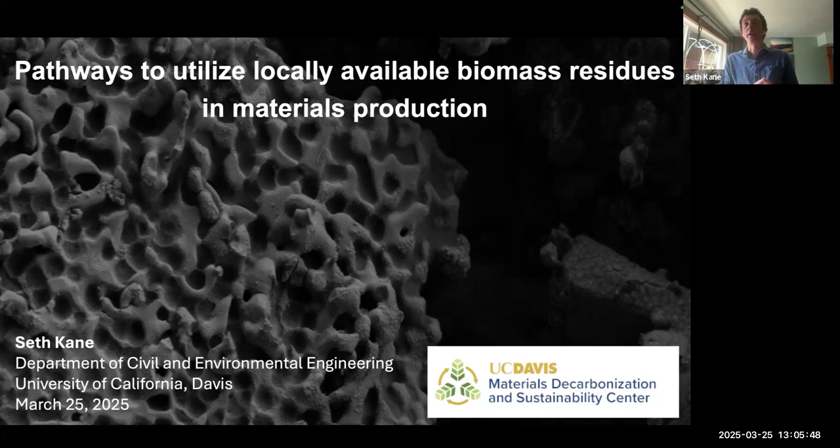Awesome. Thank you, Savvy, for the introduction, and thanks everybody for being here today. So as Savvy mentioned, I'm going to be talking about pathways that we can take to utilize different biomass residues in different materials, how those can contribute to decarbonization of materials production, and how those can contribute to carbon dioxide removal broadly.

Okay, and so we're going to try to go through three goals of how to use these materials. The first is to talk about what pathways have been examined that allow us to utilize these biomass residues in materials production. The second is going to be what trade-offs are there between using those biomass residues for energy producing processes versus using them in materials, and what considerations we might want to make between different pathways to utilize those in the best way possible. And then how we can utilize those residues in which materials. So are there particular residues that work well in one material, but not another?

And so to start with, I want to give some context around what global materials production looks like and what the availability of biomass residues looks like in comparison to that. And so when we look at the materials that we're producing, there's a lot of concrete, a lot of wood, a lot of asphalt, some brick, steel, ceramics, and plastics. Of that concrete, about 4.2 gigatons is cement. And relative to that, we are producing more agricultural residues than any individual chemically processed material. So not including the aggregate in that concrete, there's more total agricultural residues than any individual material.

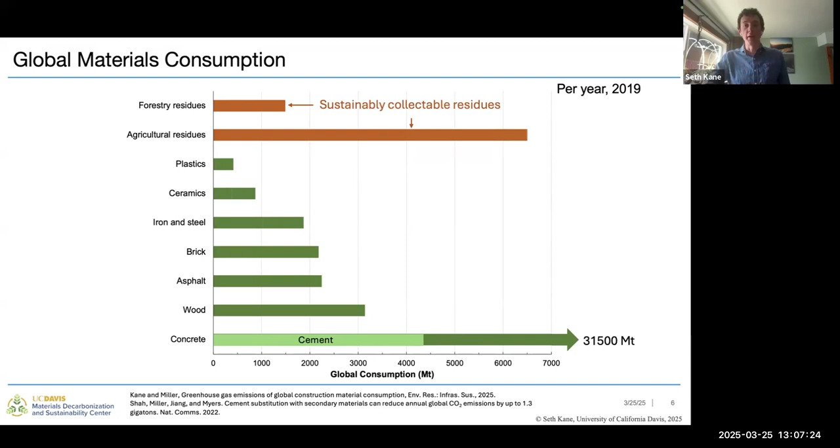In addition, there's some forestry residues. And when we're talking about these masses, and we're going to carry this through, this is the amount of these residues that we can collect under sustainable agricultural practices. So leaving enough in the fields to allow for the soil to regenerate, not just pulling everything out.

When we look at the emissions from this, we can see our iron and steel and plastics move up a bit and become the second and third most emitter, even though they had a little bit less production. And we can compare this against the amount of carbon that is uptaken by photosynthesis and stored in our forestry residues. And between the 7 materials shown here, we emit about the same amount of carbon from production of these materials as are stored in agricultural and forestry residues.

So we can see there's really a lot of potential here, both in terms of the amount of mass produced and the carbon fluxes into these materials to potentially use these to offset some of the emissions from materials production, and enough mass of these to do this at a fairly large scale. And we're going to focus most of our discussion in on these big three of concrete, steel, and plastics, and really mostly on concrete and plastics for some reasons we'll get into in just a little bit.

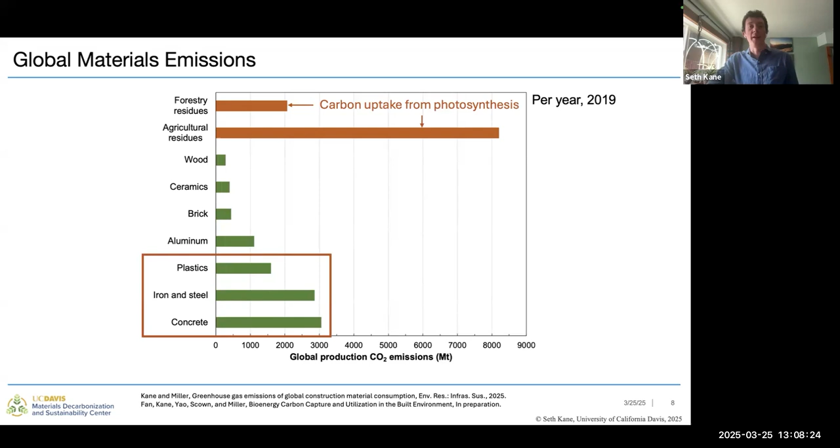It's important to note also that when we're talking about these residues, they're not all the same, and we don't produce the same amount of all of them. So we really produce a lot of corn stover, and then after that, rice straw, forest residues, and wheat straw, with some lower amounts of some other residues.

In addition, focusing in on those 4 highest produced residues, we can see that they have some variations in properties. So here we're showing the 3 key organic components of biomass. That's going to be your cellulose, your hemicellulose, and your lignin. These make up most of our plant-based biomass globally. And then there's also an inorganic component. We can see that these vary a little bit, with our wood-based biomass having more lignin and less hemicellulose, and our straws having more.

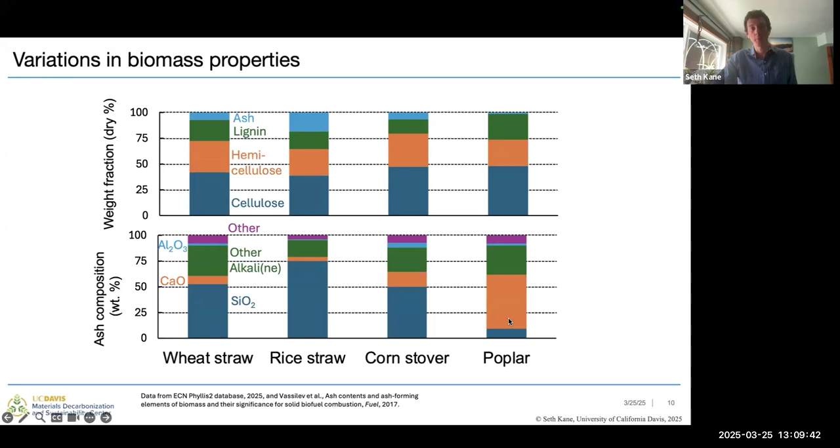When we look at the composition of that ash, which is going to be important for using these materials in concrete, we can see that relative to the other materials, the rice straw really has a lot of silica content. That'll give it some pozzolanic reactivity in our concrete. And in contrast, there is very little ash in our wood-based materials, but a higher percentage of that ash is calcium than in those other materials. Okay, so that's what we have for biomass in the context of material production.

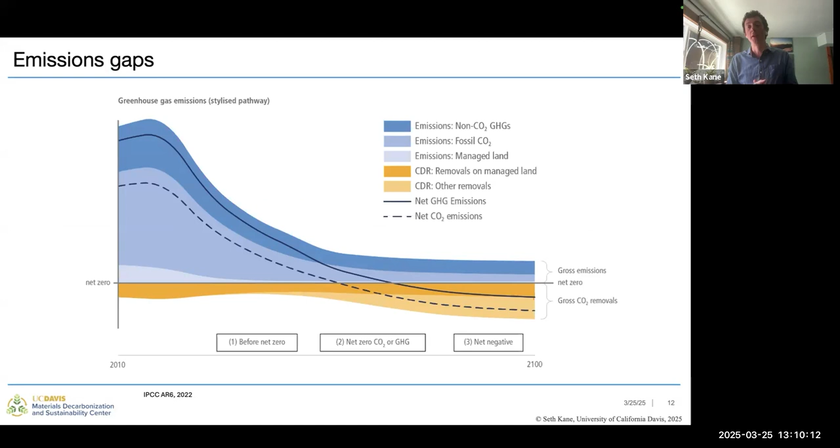So how does this fit into how we're thinking about decarbonizing materials production currently, as well as how we're thinking about carbon fluxes as a whole currently? And so this is a figure from the IPCC showing the amount of carbon dioxide removal that we will need to meet net zero by 2100. And that is a fairly significant amount. And one key way we can do this is by storing carbon in the materials that we're already producing.

And so this is from an excellent paper from a recent PhD graduate in Professor Miller's group, Dr. Van Roijen, that was recently published in Science, examining different ways that we can store carbon in materials. And I've highlighted in green here the different pathways that could potentially utilize biomass residues. And so those are integrating biochar into cement, wood-based products, and in particular applications like particle board, where we could potentially be using residues, bio-based plastics, biomass fibers in brick, and then bio-based asphalt.

We are mostly going to focus our discussion of this on that biochar and cement, as well as a few other pathways that weren't included in this work. But it is important to note that there's these other pathways as well, and we'll discuss those a little bit as we go through.

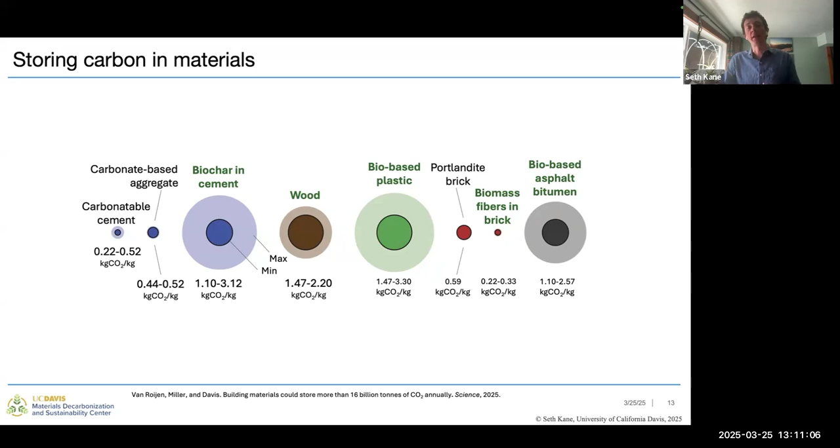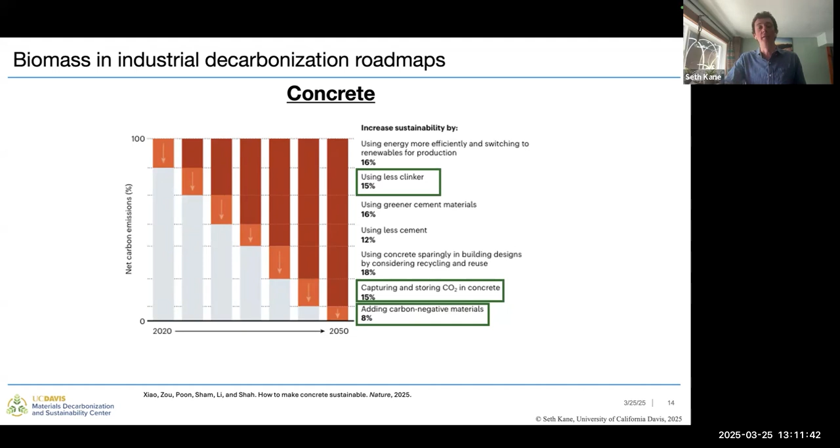And so when we look at roadmaps for decarbonizing concrete, this figure is from a paper that was published in Nature about a month ago. There's a number of different ways we can integrate biomass to do this. So here I've highlighted using less clinker. If we're replacing primary clinker with biomass-based products, we're using less clinker. Potentially integrating these materials can increase the porosity of concrete, which might allow for more CO2 capture and storage. And then if we're adding biochar, as we saw in the previous slide, we're potentially creating carbon negative materials that are being added in there. And so these can play a role there.

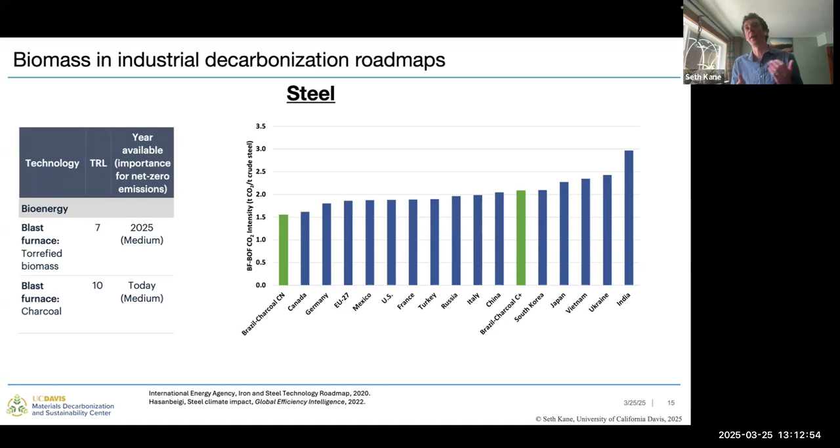However, they're not always using residues for that. And when you account for those agricultural emissions, that does go up a bit, which is what's shown in the green bar on the right there. And so this already exists at a very high technology readiness level, as I said, about 10 million tons per year in Brazil. And there's also some pathways to do this with different technologies, such as torrefaction of biomass, which we won't be talking about. And so the reason I'm not focusing on steel as much is that these pathways are a little bit more widely applied relative to some of the others that we'll be discussing.

And then finally in plastics, this is again a paper from Dr. Van Roijen looking at different pathways that we can store carbon in plastics. And you can see that a number of these pathways involve biomass residues. So wheat straw, corn stover, sugar bagasse. These are all byproducts from agriculture that we then can use as feedstocks to produce these materials and potentially store carbon in these materials.

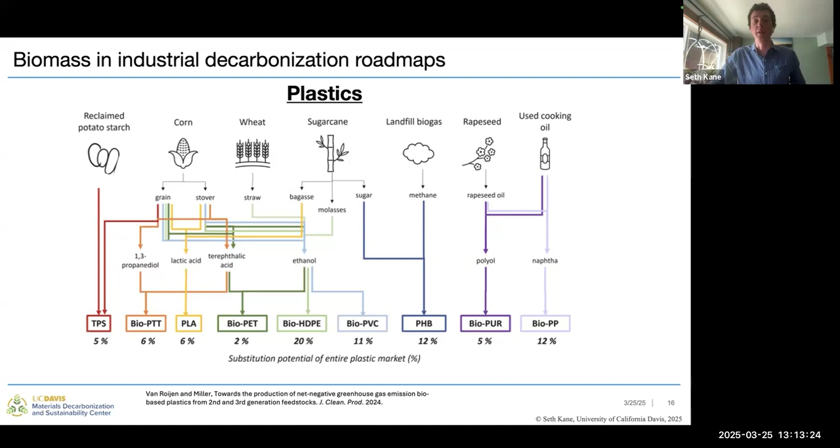Okay, so we've discussed a little bit how this fits into existing roadmaps for decarbonizing the materials. And so now I want to discuss a little bit of the exact pathways that we can use to process this biomass and potentially produce materials or energy. And so the first of the pathways we'll be discussing is combustion of that biomass.

So this is where we burn the biomass under excess oxygen, a process I'm sure we're all familiar with. And our primary products are going to be an energy product. And then that ash will vary a little bit depending on the ash composition of the original biomass. So as we saw earlier, if it's wood, there might be a little bit less ash. If it's a wheat straw, there might be a little bit more ash. And depending on the exact facility design, this can cause some issues during combustion of the biomass. If it is very high ash, potentially can form some slag products that might be detrimental to running your process.

Yeah, the second process we're going to talk about is gasification. So this has then slightly limited oxygen, so not complete combustion. And you're producing energy, a syngas product, which is a mix of carbon monoxide, hydrogen, methane, and carbon dioxide, and then a small amount of a solid biochar product.

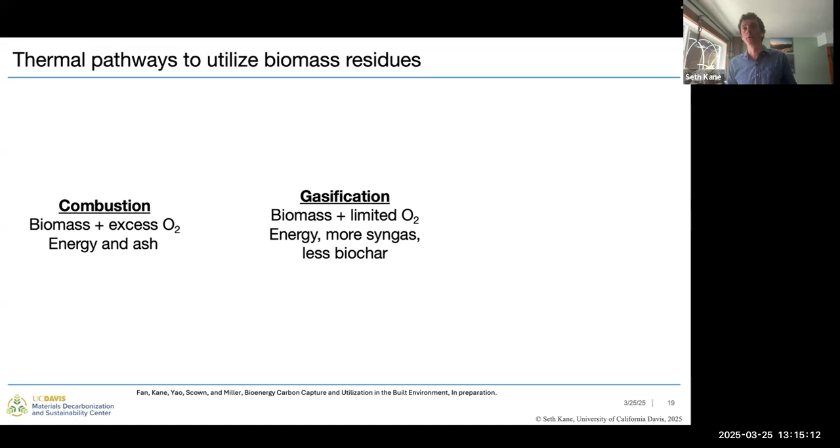We're going to be talking about biochar a lot. It is a largely carbon material that is the solid product of these partial and complete pyrolysis processes. So it's taking that biogenic carbon that is unstable, is able to be biodegraded, and converting it into a more stable aromatic carbon form that we can then use as a material. This has been pretty widely applied for carbon dioxide removal and also for agricultural soil amendments, and is currently one of the most widely delivered carbon dioxide removal methods.

And then our final method here we have is pyrolysis. That is the typical process that's used to produce biochar. And it will produce, in addition, about 30% of the weight of the original biomass as syngas, about 25 to 45% biochar, depending on the ash content present in the biomass to start with. So that ash is going to end up in the biochar along with that carbon product. And then in addition, a bio oil, which is a mix of lower molecular weight carbon products that are in the liquid form.

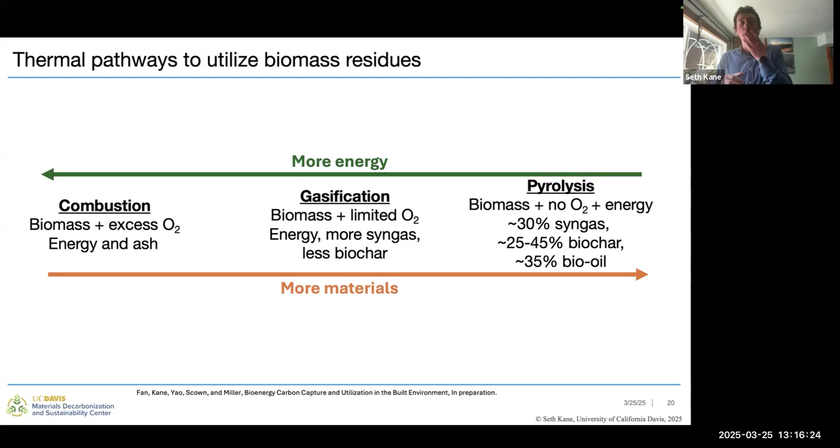You can run this process at different heating rates. So at very high heating rates, you'll have a fast pyrolysis process, which will produce more bio oil. At slower heating rates, you'll have a slow pyrolysis process that will produce more biochar. But functionally, these materials are fairly similar, and can still be modified to have the properties that we need to use them in materials. And so we're going to be discussing gasification and pyrolysis together as processes that produce biochar. Just keep in mind that the relative amount of biochar we might be producing will be different between those processes.

And when we look at these trade-offs, we can see that typically our combustion process is producing more energy, but less materials with almost no biomass carbon present. And then as we move to the right here, we're producing less energy and more materials, with these ranges showing the different variations between different biomass types.

In addition, from that pyrolysis process, we can use that bio oil product as either a fuel source, so combusting it, or as a material, potentially in bio-based asphalt, as we saw in one of the earlier slides. And that just has a little bit of a trade-off depending on, is there a market for that bio-based asphalt, or is it easier just to burn it? But we can then store more carbon potentially by utilizing that.

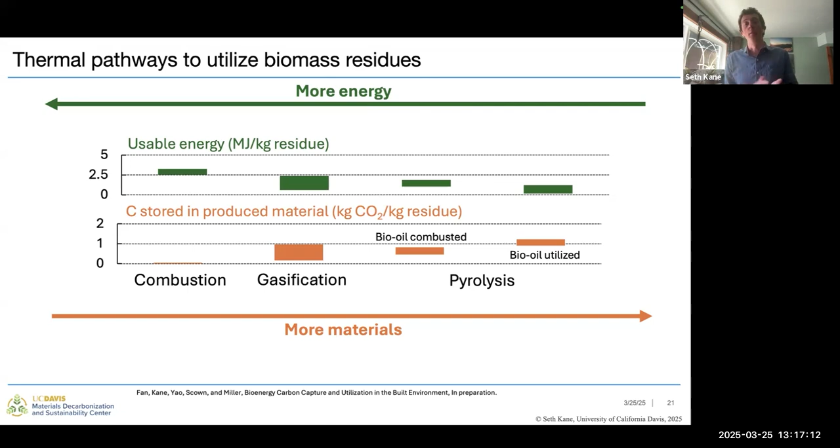In addition to those thermal conversion pathways, we can use some of these biomass residues directly. So that might be, for example, in a composite material. One that a lot of people are familiar with might be Trex decking, which utilizes sawdust in a polymer composite. But there's also things like hempcrete. You can potentially use some of these biomass residues in place of primary wood in particle board and plywood, and that's been done by a number of startups.

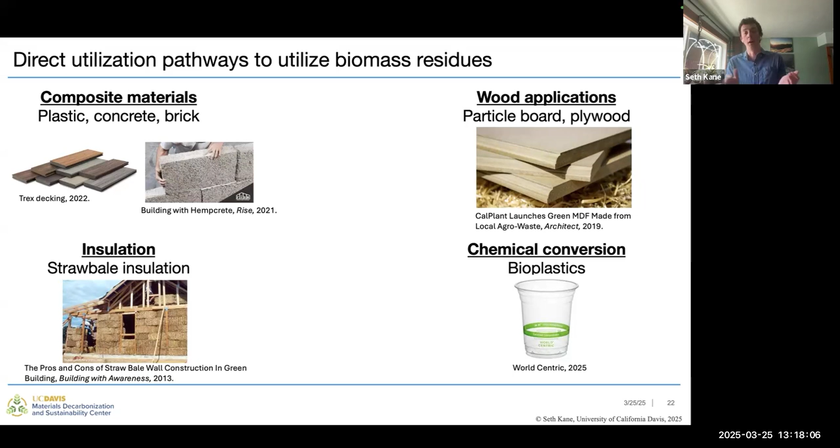Straw bale insulation is an example of using these biomass residues as an insulation material, or you can chemically convert them, be that either to bioplastics or in a biorefinery to separate out, say, the cellulose component of that, and use that in more valuable products. We're mostly going to be focusing on those thermal conversion products and a little bit less on these, but keep in mind that there are ways to use these directly as well.

And when we look at all of this together, basically what we see is that there's a linear relationship between the amount of carbon in the material that we're burning for energy and the amount of carbon in the material that we're putting into a material.

And as we move into the pathways further to the right here, we reach a point where there's more carbon being stored in the material from that biomass than is being emitted.

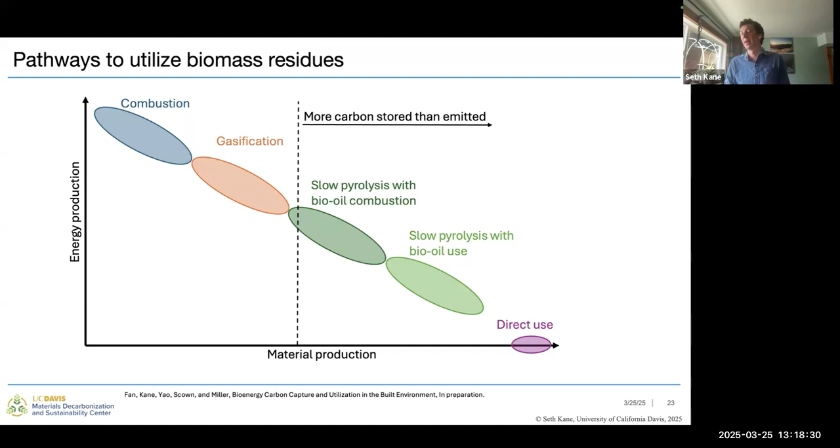Okay, so I'm going to start by talking about the combustion product of ash, different ways that we can use that. This is going to be a pathway that prioritizes energy production. So we don't necessarily expect huge benefits from the material itself. It's sort of just a byproduct of that energy generation.

And so this example here is from a paper by a PhD student that recently graduated from the group, Patrick Cunningham, where he treated different biomass ashes with CO2. He was able to increase that from that maximum of 0.046 we see of just CO2 present in the ashes to about 0.1 kilogram of stored CO2. This is still not quite up to the theoretical maximum, but that's dependent a little bit on exact process design and optimization, things like that.

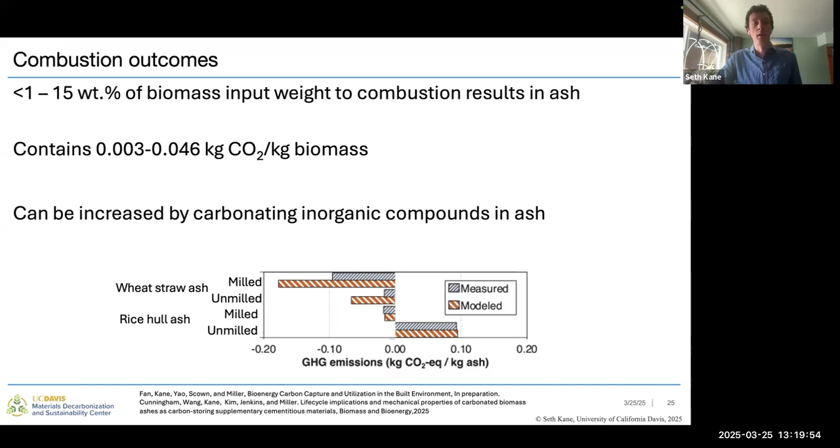Okay, so we then can take this ash and put it in concrete as a supplementary cementitious material, replacing that primary cement fraction of our concrete with either 5 or 15% of these ashes. And here we're just looking at a mortar control compared against a wheat straw ash and a rice hull ash at 5 or 15%. And those are being applied either with or without that CO2 treatment.

And so we can see that in general, the rice hull ash is performing a little bit better than that wheat straw ash. That's a result of that higher silica content that we discussed earlier, and that can contribute to those pozzolanic reactions in there. In general, when we are CO2 treating this, that strength is going down. In the case of wheat straw, it's potentially going down a lot. And that's because we're having that CO2 react with some of these compounds that might be participating in the reactions and making those a little bit less reactive.

When we look at the greenhouse gas emissions on the right, we can see that all of these processes reduce the total greenhouse gas emissions of that production by about the same amount. There's not a big difference between CO2 treated and untreated, and there's not a big difference between the different ashes. This is because the carbon contained in those is fairly small relative to the offsetting of the emissions of the cement production itself. And so that emissions reduction is mostly dominated by how much of that ash we are putting in rather than the carbon stored in the ash itself.

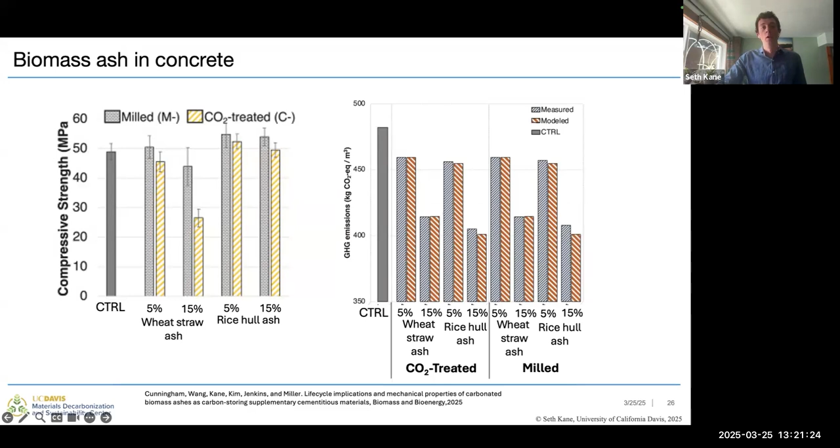We can do something similar by putting that biomass ash into plastic. So again, we've got a measure of mechanical properties on the left and our global warming potential on the right. And we're using, in this case, 5 and 20%. Again, both that wheat straw and that rice hull ash.

And so we can see that we're going to increase the modulus of those plastics, so get a stiffer plastic out as a result of the inclusion of this ash. We would expect a little bit less of a chemical component to this. It's mostly just a filler in these materials, and that filler is not deforming as much as our plastic. So it makes sense that it would get a little bit stiffer.

And then we also see about a 5% and 20% reduction in the global warming potential of that plastic as a result of replacing primary plastic with these waste ashes that might have relatively little greenhouse gas emissions associated with them. In this case, we are just showing the CO2 treated ashes in the plastic because there is not that actual chemical interaction. We see basically identical performance mechanically between the treated and untreated with CO2 ashes. And so you can squeeze out a little bit extra benefit here by treating those ashes with carbon dioxide, whereas in the concrete, we do see that reduction in mechanical performance.

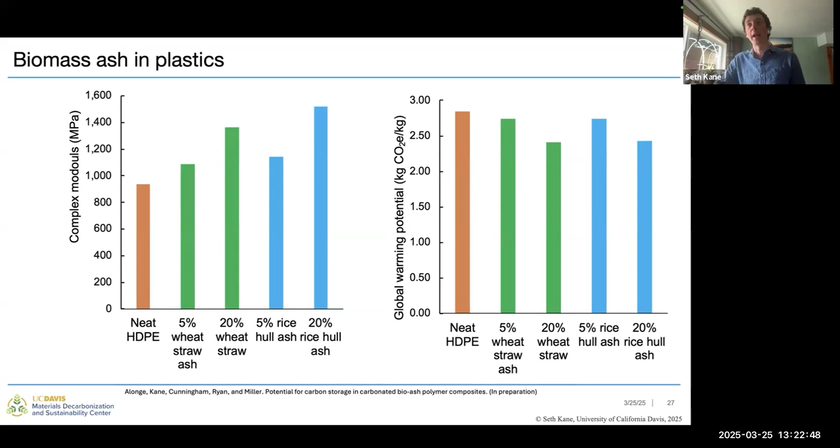Okay, so that's kind of two pathways to utilize that biomass ash from combustion. We have a lot of that available already. There's about 1,000 facilities for biomass production globally. And so that's something that we can readily apply with facilities that exist and could be done very quickly.

These next two technologies, gasification and pyrolysis, are at much smaller scale. And that's kind of important to keep in mind as we go through. We'll discuss that a little bit at the end. But essentially how these processes work is we'll start with our biomass residues after we've grown the biomass. Because there are not so many of these facilities, typically they might have to be transported then from where the biomass is grown to a gasification or pyrolysis facility where they'll be dried, go through this thermal conversion process, and then you end up with

syngas, bio-oil, and biochar. That chemical conversion process or thermal conversion process does require some heat, and the drying does require some heat. Typically, in an efficient and well-designed process, we'll be able to use a small amount of the heat produced from combusting the syngas component to meet the energy demands of that process. However, this does depend a little bit on our exact process design.

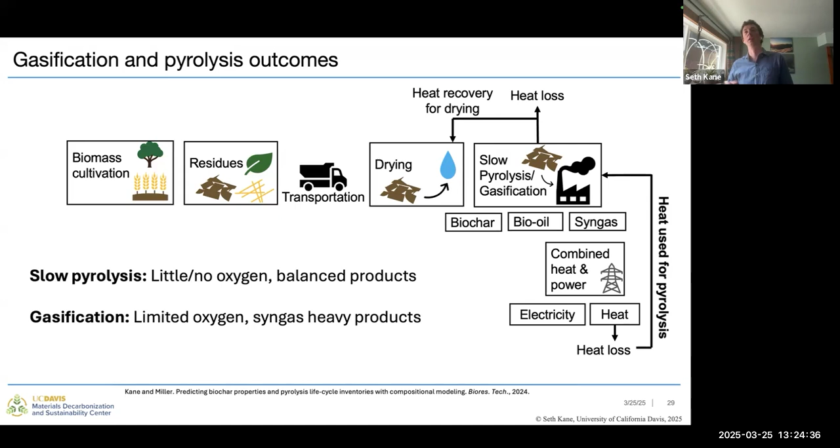And then from combustion of that syngas, we get some usable heat as well as some electricity. We can either combust or use our bio-oil as mentioned earlier, and then we get our biochar, which will be mostly what we'll be discussing here. And then again, just to highlight, from our slow pyrolysis, we get a kind of balanced yield of those three products. From our gasification, we're getting a lot of syngas, just a little bit of biochar.

And so quantifying the results of this a little bit, we're going to get different amounts of bound carbon out of our pyrolysis process, depending on the exact temperature. This is specific here to pyrolysis, but there would be a similar relationship with lower numbers from gasification. And we can see that as that material thermally degrades, we see a quick decrease in the amount of bound carbon in the biochar at about between 300 and 400 degrees Celsius.

This exact amount at lower temperatures is a little bit misleading in this because this is just at the factory gate. It doesn't account for degradation of that material over time. And we'd expect those lower temperature materials to degrade more quickly, whereas the higher temperature materials are quite stable over centuries. We also produce a little bit more energy as we increase that process temperature. This is a result of the hydrogen groups present in that biomass reacting off, and we're then able to use that hydrogen for energy, and our CO2 emissions stay pretty stable along with that bound carbon as we increase our temperature.

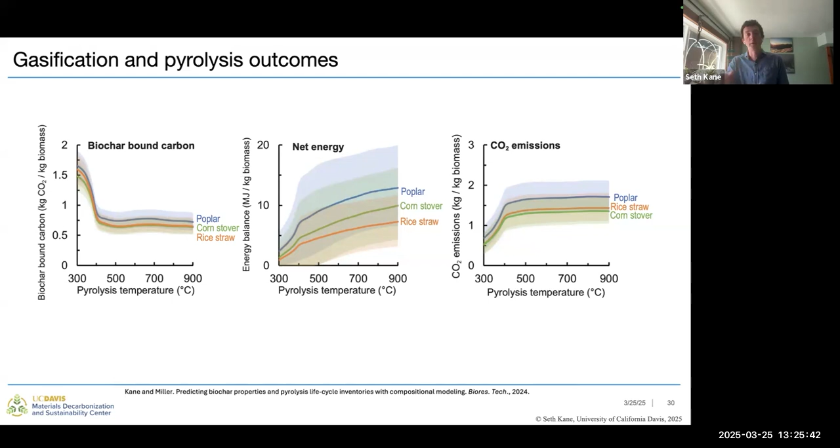In addition, it's worth thinking about that these processes can be designed in different ways. So we could have a highly efficient process where we're reusing that heat from combusting the syngas to meet our energy needs. We're using a combined heat and power process to capture the most energy we can from those products we are combusting. We have high thermal efficiency, and we're using that bio-oil for material production. Or we could have a very inefficient kind of poor practices scenario where we're using a fossil fuel input to meet our energy needs, or we're just flaring our energy products, and we're running this process with fairly low thermal efficiency. And those will have fairly different outcomes.

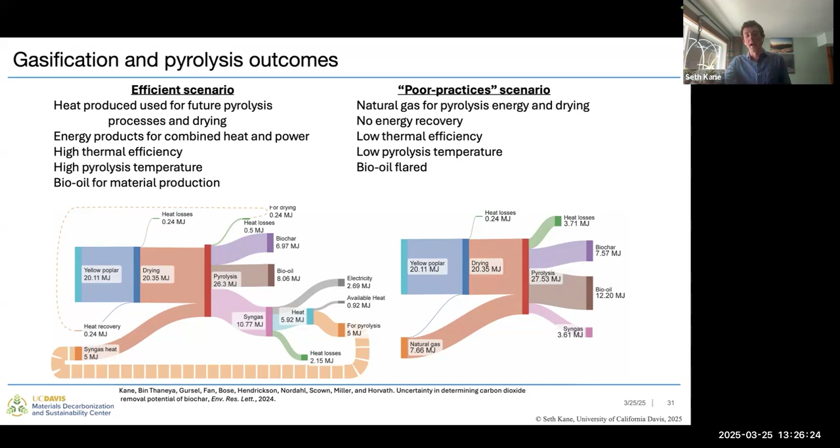And so these figures are showing an uncertainty assessment of those two scenarios. And just to give an idea, even with fairly high uncertainty considered, that inefficient poor practices scenario across basically the entire distribution, we would have to be putting energy in, whereas in an efficient scenario, we get energy out across the entire distribution. And similarly, for the net emissions, we are storing carbon across basically the entire distribution for an efficient scenario, whereas it's very uncertain whether we emit or store carbon in that inefficient scenario. So exactly how we do this matters.

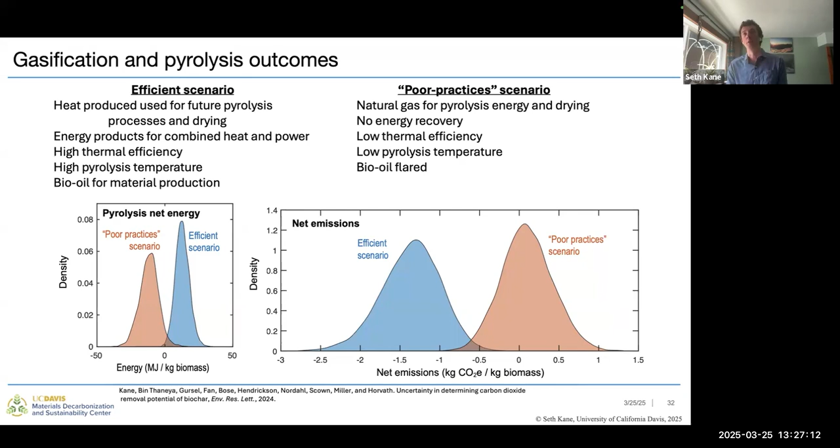About a quarter of current biochar producers report not using their energy products for anything, just flaring them. And so this poor practices scenario is not that unrealistic for current production. And it's important to keep in mind that how we make the biochar matters, not just what we do with it.

Okay, so in steel production, as mentioned, we do use about 10 million tons a year of bio-based coke, mostly in Brazil, but that's not all from residues. This can get used across the steel production process. So we have different carbon inputs of either coal or coke in the sintering and pelletizing process. We have coal inputs to the coke making process that can potentially be replaced with biomass-based carbon. And then we have coke inputs to the blast furnace.

The key performance characteristics in this are going to be that for coke in the blast furnace itself, you need fairly high mechanical strength to support the iron ore on top of that coke, because you flow the air up through the coke to produce the reducing gas. You need fairly low ash content, and particularly silica. If you have additional silica, you then need to add additional lime into your process to form slag from that. And that's going to be associated with additional greenhouse gas emissions.

Higher heating value is going to be more beneficial. All of these are going to be a little bit lower than fossil-based coke for their higher heating value, but the closer we can get, the better. And then you want to have very low decomposition at low temperatures, so you can really allow that process to get up to the high temperatures that we need for steel making without having any degradation.

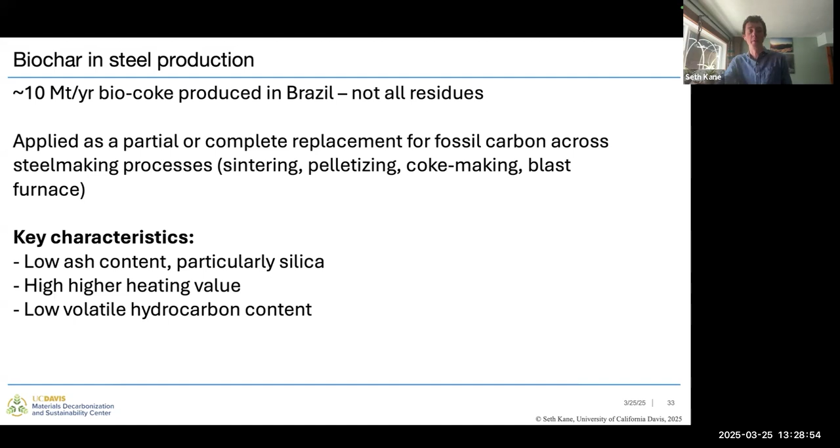And as mentioned, we're not going to talk about steel making a ton, just because this is more of an energy application almost in material production rather than a material pathway itself. And because it is being combusted, we're not necessarily storing any carbon, which is really what we want to focus on. So then after that, moving on to using biochar in concrete.

This is from a paper out of Colorado School of Mines and National Renewable Energy Lab, who did a really great job of systematically looking at what are the effects of biochar in concrete. How can we modify the properties of biochar to maximize that performance in concrete? And the three key outcomes they found were that biochar will absorb some moisture from your concrete mixture, and that's going to decrease the effective water to binder ratio in that mixture.

We know as that water to binder ratio decreases, our strength will increase, but it gets harder to work with. And so we really want to find a balance, integrate this into our concrete mixture design so that we can maximize those properties and get as close as we need to our designed properties.

In addition, the silicon content in the biochar will contribute to pozzolanic reactions. This is very similar to some of our other common supplementary cementitious materials that are high in silica and promote the formation of calcium silicate hydrate rather than calcium hydroxide, which we know increases the strength in our concrete as a result of that silicon in our biochar.

And then finally, different surface functionalizations in the biochar can increase the hydrophobicity of that biochar, which might decrease the interfacial strength between it and our cementitious matrix. This can be represented pretty well by the oxygen content of the biochar, and reducing that can improve the strength overall of our concrete with biochar.

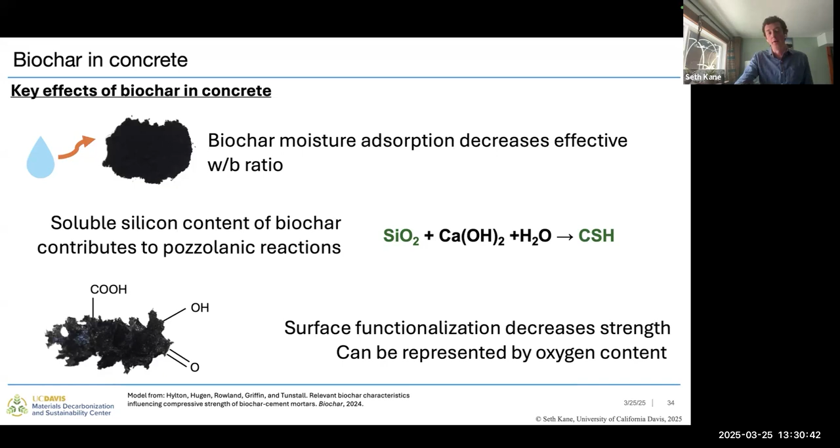And so these are the three properties that came out of that exact model, but we also can make some inferences about what might be the best feedstock by thinking about what we want in supplementary cementitious materials pretty broadly. So if we think about our different inorganic compounds, our calcium, and specifically our calcium to silica ratio in our SCMs, our alumina content of our SCMs, different alkali and alkaline compounds that might be participating in those cementitious reactions in potentially a detrimental way, our sulfur content.

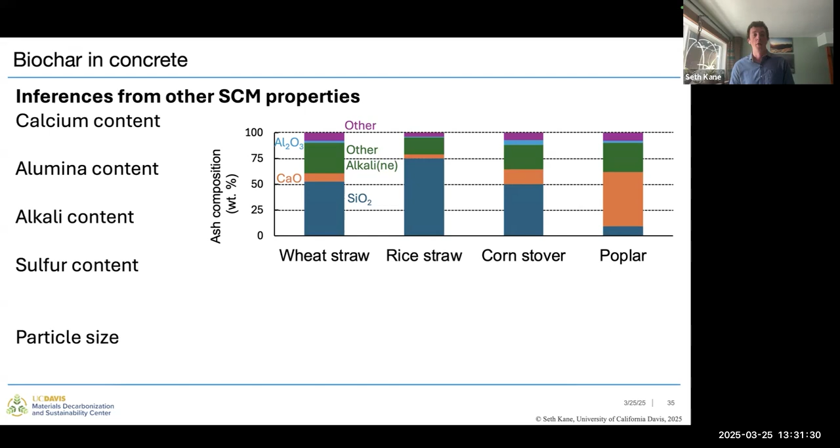And then finally, I've left this to the end because we can tune it a little bit, but it does require some energy inputs to do so. The particle size of our biochar should be pretty similar or a little bit smaller than the particle size of our cement particles to make sure that that's well distributed throughout the material.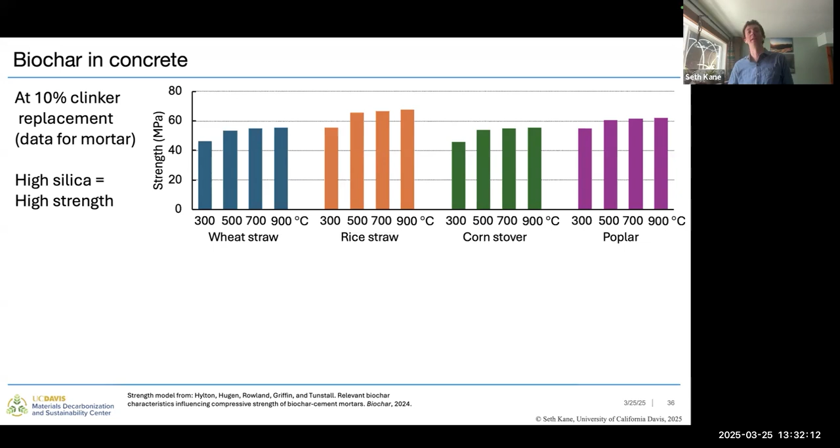And so now thinking about the outcomes, this is leveraging a predictive model for biochar properties that we developed in our group, specifically for thinking about biochar life cycle inventories, as well as that strength model developed by the folks at Colorado School of Mines and NREL. And they're looking at 10% clinker replacement, reporting strength here for a mortar that is about 44 megapascal strength with no biochar added. You'll remember here that our rice straw was our high silica content biomass, and we can see that that results in the largest increase in strength.

When we think about greenhouse gas emissions, we can see that the highest reduction in greenhouse gas emissions, so this is both the carbon stored in the biochar and the reduction in emissions from using cement, with some of those processing emissions then subtracted out, results from our high temperature biochars, and specifically our high temperature biochars that are highest in carbon. So because our poplar-based biochars had low ash content to start with, they had higher carbon in the material to start with, and more of that can be stored in the material, resulting in the greatest reduction in emissions.

In addition, even though the poplar has little, if any, silica content, it does have very little oxygen, and it does uptake a little bit less water than those other biochars. And so it has quite good strength performance as well.

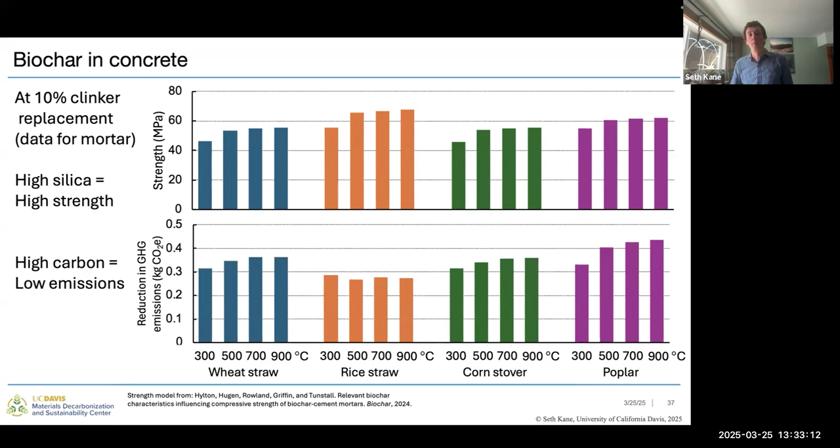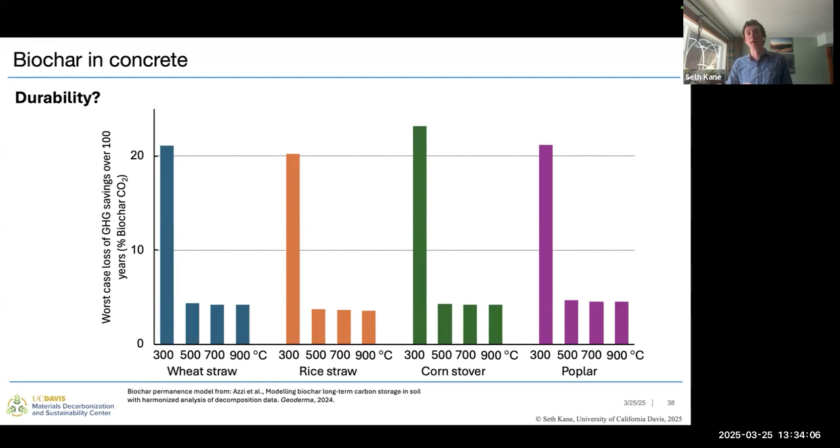In addition, we know that the introduction of that biochar will slightly increase the porosity of our concrete as a result of the porosity of the carbon in the biochar. But it also then has the competing effect of those pozzolanic reactions as a result of the silica that reduce the porosity. So we have these two competing effects in terms of porosity that's going to affect things like carbonation, chloride resistance, things like that. And then it will also impact the durability.

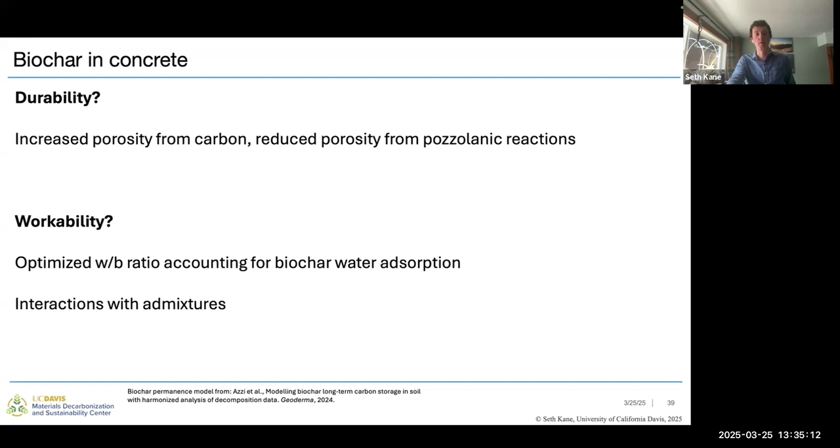So as mentioned, that water to binder ratio is heavily modified by biochar absorbing water. In addition, it can have some interactions or absorption of admixtures such as superplasticizers that might be added in there. And so designing your entire concrete mix around the biochar rather than just adding it in is going to be important for getting good workability properties. Durability is really an area where there's a pretty big need for additional research in this space and long-term testing to validate what we would expect from the performance of these materials.

So to put this in context of concrete and cement production and how much biochar we might be able to use, we currently produce about 4,200 million tons of cement, about 340 million tons of fly ash, which is one of our common SCMs that we're using today, about 340 million tons of blast furnace slag, again, a common SCM that we're using today. So those are all pretty large numbers. In contrast, we're only producing about 0.35 million tons of biochar currently. So obviously that cannot be a drop-in replacement right now for the existing SCMs.

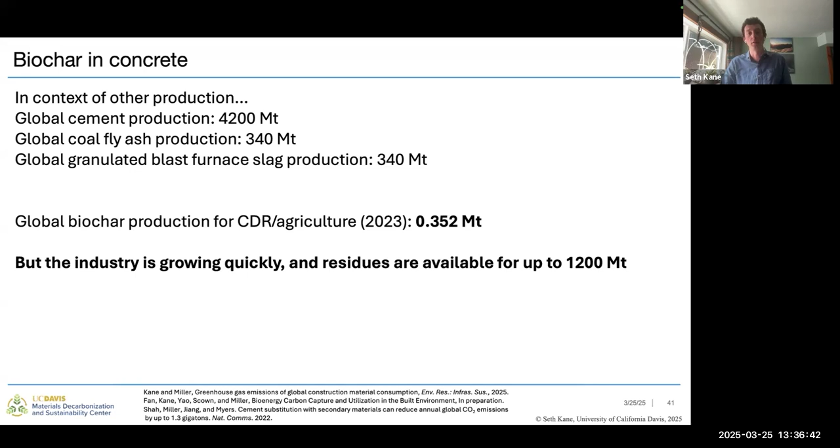However, this industry has been growing quite quickly. It's been more than doubling the amount of biochar produced annually the last couple of years. And from the total residues that are available, we could produce up to 1,200 million tons, which would be much more than we could use in cement production at that 10% replacement. So there is a lot of potential. We don't necessarily have to stretch our available biomass residues very thin to be meeting, say, a 10% replacement of cement production with biochar. And that's not accounting for that we might be using other SCMs. We don't expect to have that much less slag. All kinds of trade-offs in how we go about decarbonizing this, how much carbon we are able to store in these materials.

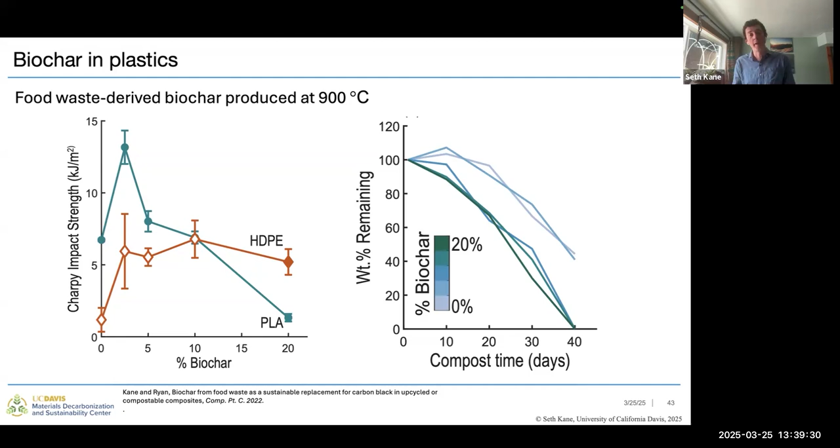However, there are then some interesting interactions. For example, if we wanted to have our PLA biodegrade at the end of life, the addition of that biochar does decrease the composting time of that PLA, which in some scenarios might be beneficial. And that's a result of it allowing more moisture to travel into the structure of the PLA and allow that hydrolytic degradation to occur a little bit quicker. So there's potential ways that we can integrate this into different plastics for different applications. Exactly how we do that will depend on the exact application of those plastics, which might be a little bit more varied than our application of our concrete, as well as the higher variation in properties between our different plastic types.

Yeah, when we think about what we want, whereas in our concrete, we wanted high silica content and hydrophilic biochars, here in our plastics, we want low ash content, high carbon content, hydrophobic biochars. So we're not necessarily seeing the exact same resources being the most beneficial in each of these cases. So we might want some more wood-derived high temperature biochars in our plastics, whereas we might want something like rice hull ash in our concrete.

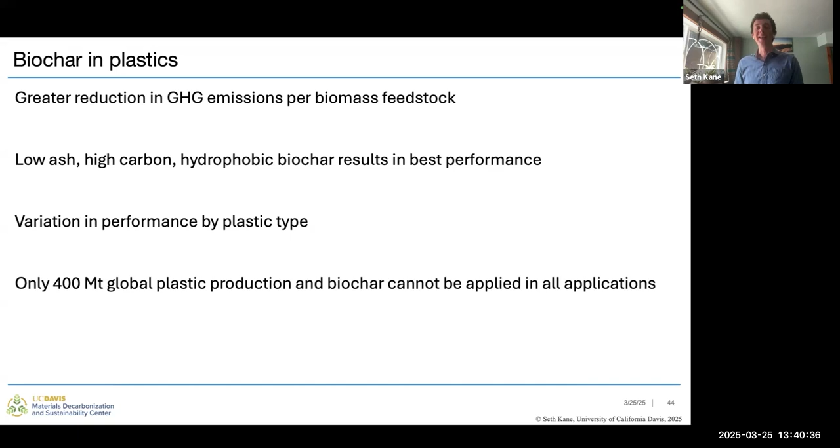Thinking about the availability of these, there's only about 400 million tons of plastic production globally. We can't apply our biochar in all applications. And so we could potentially be replacing some of our petroleum-derived carbon additives in a number of applications with biochar quite easily. And it's been pretty well demonstrated that these have equivalent properties.

So going through the couple of things that we discussed here, what pathways have been examined to utilize biomass residues in materials production? So we've looked at direct use of those biomass briefly, use of combustion ashes, and then use of biochar produced from gasification and pyrolysis. For ashes, just plastic and concrete production, and for our biochar in all three of steel, plastic, and concrete production.

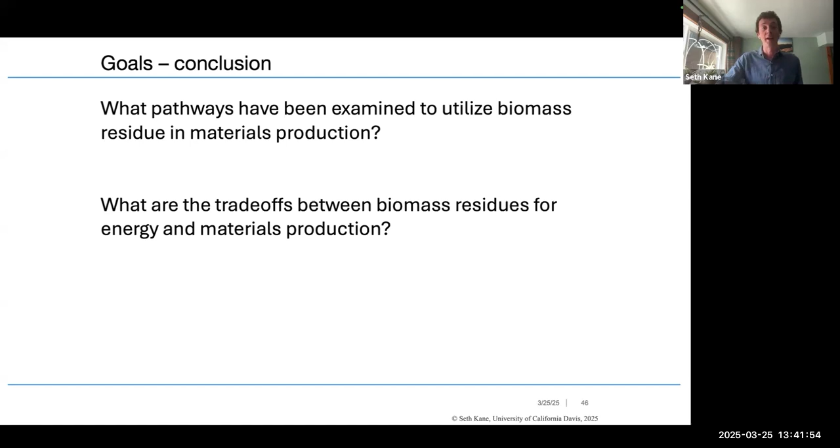For the trade-offs, we know that in our more oxygen present thermal conversion processes, we're going to be producing more bio-based energy, but less materials. And those materials might contain a lot less carbon because we've converted that to CO2 during producing energy, whereas our pyrolysis and gasification processes result in a higher carbon material that can potentially have greater benefits in materials production, but we're producing a lot less energy as a result of that carbon being stored. And so a trade-off there that's going to depend on exactly what the emissions of your materials production and energy locally look like. And then finally, we've got which biomass residues can best be applied in which materials.

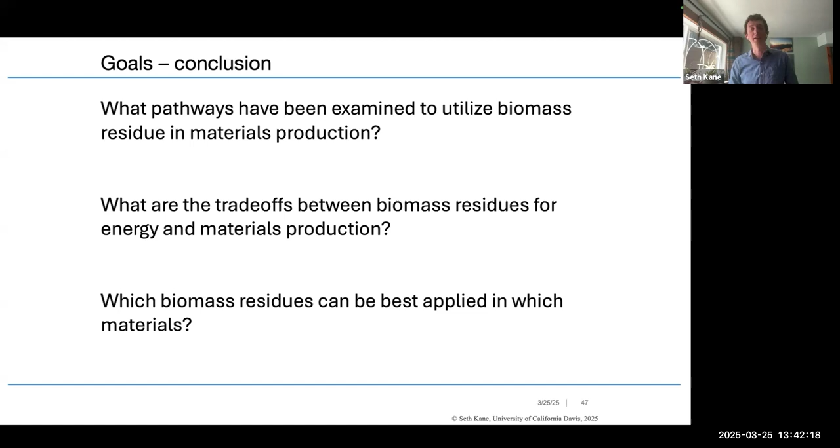So we see wood-based residues potentially being more beneficial in our plastic applications, rice hull ash and high silica content biomass being more beneficial in our concrete application, and overall looking to maximize our carbon content that we're putting into those materials if our goal is to store carbon in those materials.

And so just briefly, as we wrap up, a little bit of discussion around the actual application of this. All of the applications we've discussed today have been applied commercially at least at pilot scale and are rapidly growing. So there's a lot of interest in this currently across all of these applications. One thing that is really needed on the concrete side is standards for the use of biomass residues as an SCM. So getting some standardization around different practices for this, and then communicating that out to practitioners so that these can be applied.

From the biochar suppliers, there's a need for increased biochar availability, as we saw that amount of biochar produced is relatively low relative to the materials production, as well as consistency in the product produced over time and design of that process to be specific to material science applications rather than agricultural applications. So on the consistency side, you want to make sure if you're designing your concrete batching plant around potentially integrating biochar, that you know you're getting the same biochar product batch over batch. You're not going to get something that all of a sudden absorbs way more water than your previous batch, things like that.

And then leaning towards higher temperature production for better performance in materials, whereas some of the agricultural applications that are being commercialized currently trend towards lower temperature production of that biochar. And then on the economic side, biochar is currently $235 per dry ton at the factory gate if you're purchasing a high volume. That is a little bit higher than the current price of cement, much higher than some of the existing SCMs. But if we're looking on the plastic side, that's much lower than the price of current commodity plastics.